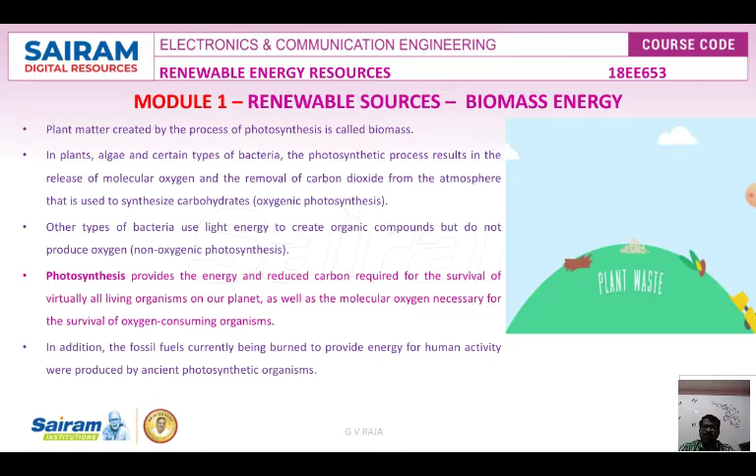There are several methods used for the conversion of biomass into electricity. Either we can directly burn the biomass to generate electricity, or synthesis gas production by gasification, and methane gas production by anaerobic digestion, like biogas.

That is how biogas is generated: we keep all agriculture waste and vegetable waste along with cow dung, cow waste, animal waste, and pour it into a basin or boiler as a liquid or semi-solid form. We pour in some water, and the basin is fully covered with some kind of varnish which will avoid the rays of light from the sun falling onto this basin or boiler.

After 2 or 3 days, if you open that boiler or basin, you will get a bad smell. That is not a bad smell, it is methane smell. If you burn that methane, fire will be formed. That gas is called biogas, and it is used for domestic applications.

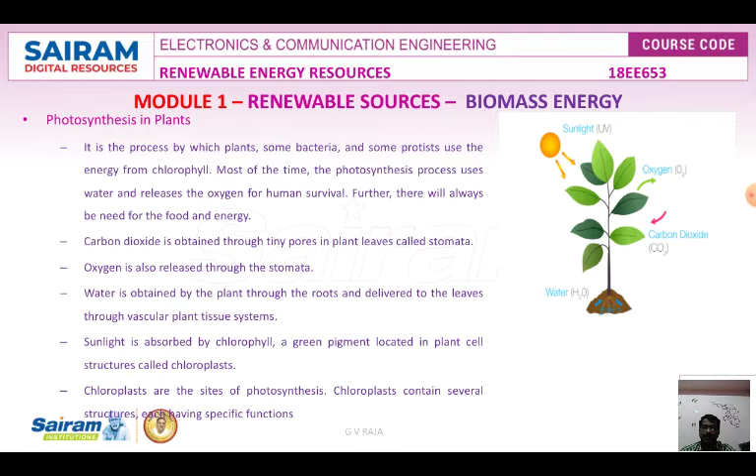There are two types of photosynthesis process. One is oxygenic photosynthesis, another is anoxygenic photosynthesis. The photosynthesis process in all plants, which involves some bacteria, involves the reduction of carbon dioxide to carbohydrates and removal of electrons from H2O. Water is poured into the roots, so electrons from the H2O have to be removed, which will release oxygen. This process we call oxygenic photosynthesis.

Anoxygenic photosynthesis: this occurs in the domain bacteria and has representatives of four phyla, like purple bacteria, green sulfur bacteria, green gliding bacteria, and gram positive bacteria. These also use light energy to make carbohydrates from carbon dioxide and water.

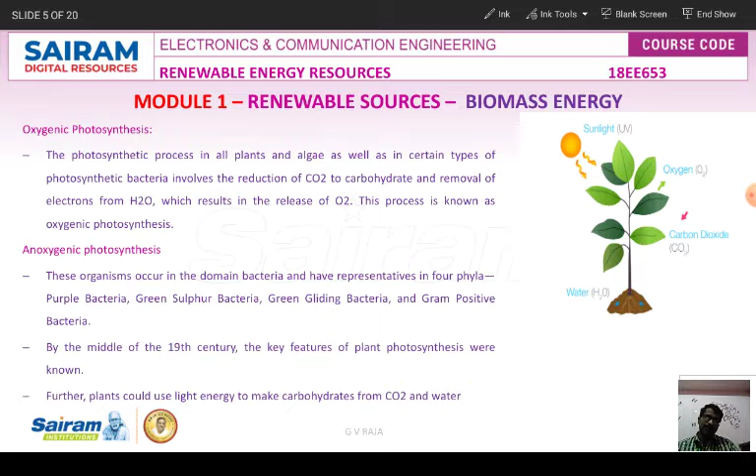The conversion of the remaining waste product to usable energy includes generation of methane gas with the help of biogas or other kinds of fuels like biological conversion, hydrogen also used. Generation of electricity either from the first step itself, that means biogas conversion itself, or through thermomechanical process, where biogas is sent as steam to rotate the turbine which generates electricity, is called a thermomechanical process.

And the same bio waste materials are used as fertilizer for agriculture and crop cultivation process. Treatment processes are designed to reduce waste to an innocuous form, without or after energy recovery. The most familiar techniques are burning of waste at high temperature in the presence of oxygen, and breaking down complex compounds using heat in the absence of oxygen. That is the major biomass production.

So we know that the sun is the primary source of all kinds of raw energy, including biomass. The next process is biogas. Biomass, for example, burning wood or a tree, will generate heat. That heat is used to boil water, which is converted into steam, and it is passed through the turbine. The steam rotates the turbine and generates electricity with the help of a generator. This is nothing but biomass conversion.

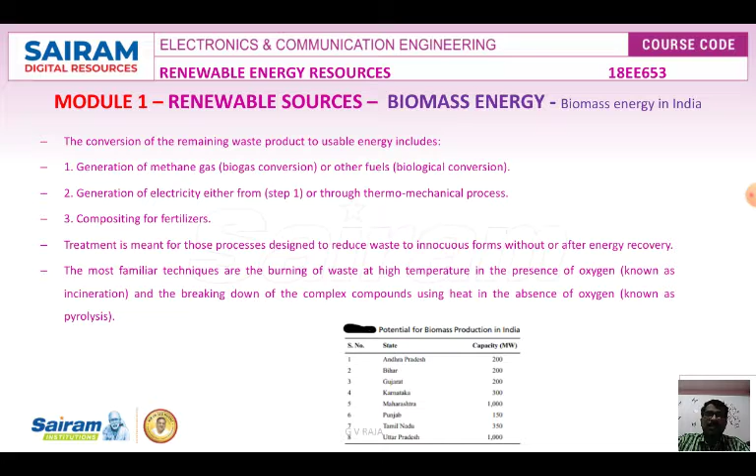Next is biogas conversion, which is also a promising energy conversion technique. Here all bio waste, vegetable waste, and other kinds of waste are dumped into a small turbine or boiler or furnace, and the furnace is covered with a black coating in order to avoid sun rays falling onto it. You might have seen this kind of setup nowadays in villages and rural areas.

After that, gas is produced due to the reaction inside this component. This gas is used as a combustion fuel, for things like forest foods and waste, agriculture crops and residues, residential food waste, industrial waste, human and animal waste, energy crops—all these things are dumped into this furnace. The gas is produced and used to steam water, which is converted into steam, and electricity is produced.

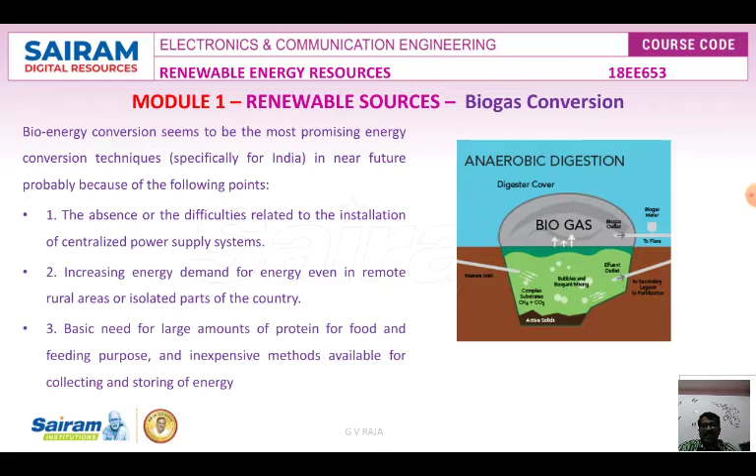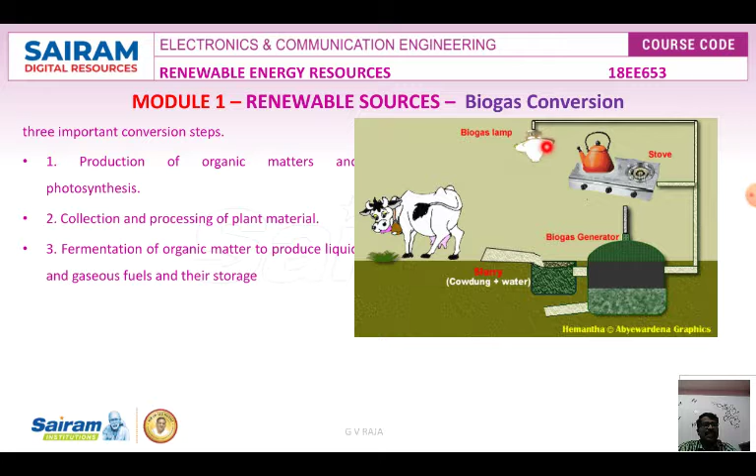This is biogas conversion: the production of organic materials using photosynthesis, collection and processing of plant material, and fermentation of the organic material. So animal waste, cow dung, with water, is given to this furnace, then gas is generated, which is used for lighting lamps as well as stove operations.

Next, biological hydrogen production. Hydrogen is a clean fuel. It is an energy carrier that can be used for a broad range of applications, and is the most abundant element in the universe. The sun and stars are composed largely of hydrogen. Hydrogen is a component of more compounds than any other element.

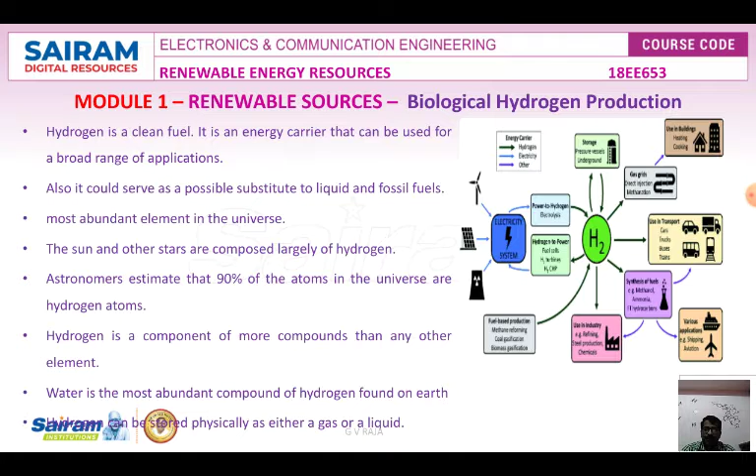The storage of hydrogen gas typically requires high pressure tanks. The storage of hydrogen as a liquid requires cryogenic temperatures because the boiling point of hydrogen is very low. Hydrogen can also be stored on the surfaces of solids or within solids.

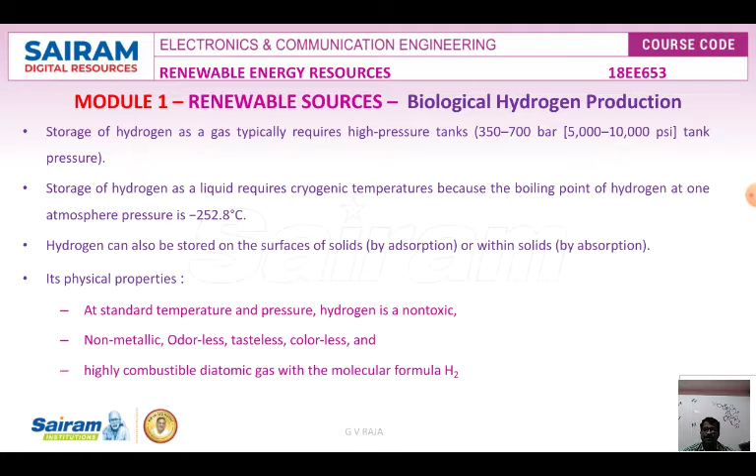So biological hydrogen production appears to be another promising conversion technique, where the only energy input is solar energy and a hydrogen donor. The biological hydrogen schemes are produced at a low temperature level, and the scheme is free from pollution. The fuel produced, hydrogen gas, is a very clean burning fuel. It can be used for human and animal consumption purposes.

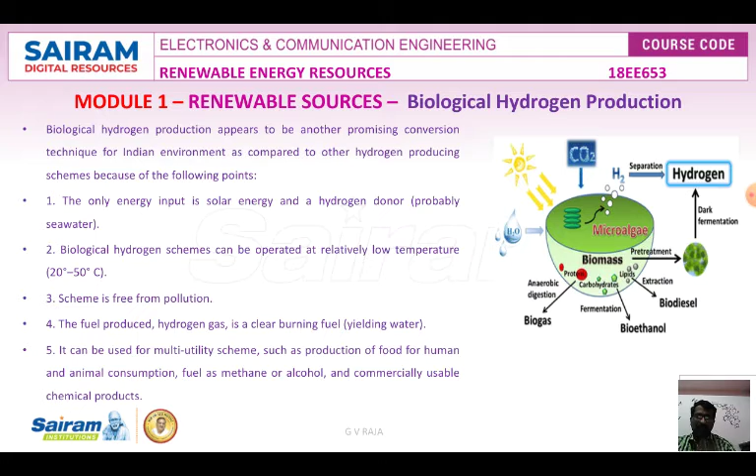The next one is decentralized and dispersed generation. Decentralized energy is the opposite of centralized energy. Centralized energy means every unit of energy is created in one area and given to the distributed area by means of transportation or transmission of the energy. That is centralized. Decentralized means generating energy on-site itself. For example, in an industry itself, we can generate energy with the help of a windmill or solar cell.

Or with biomass. This is called decentralized and distributed energy system, an on-site power generation system. It generates the power and energy needed by residential, commercial, or industrial customers on-site.

Some of you moving into metropolitan cities may have seen that in some industries they have their own power plant for generating their power. In some malls also they keep some kind of power generation like wind generation, solar generation, electricity generation with the help of a solar energy system, or solar refrigerator energy systems.

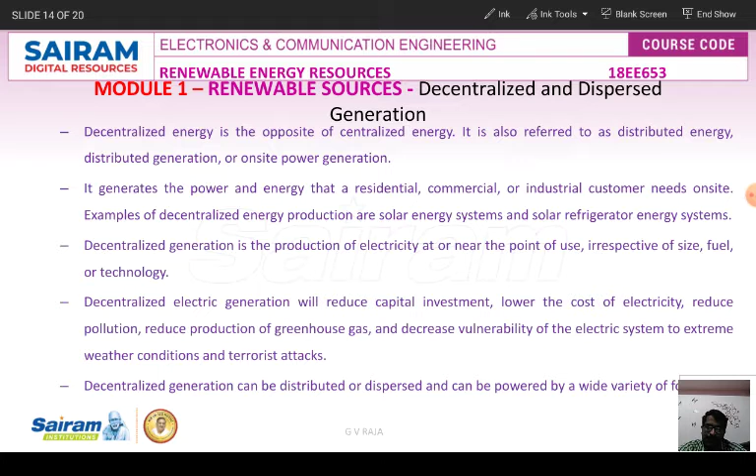So there are various kinds of dispersed generation. Advantages include low cost electricity, geographical factors, saving outage costs, increasing demand in the intermediate sector, and a low payback system. If you are talking about distributed generation, there are two types: one is non-renewable, the other is renewable fuels. Both non-renewable and renewable energies are used in distributed generation. Non-renewable means oil and gas, natural gas are used. Renewable means wind, solar, hydrogen, and biomass are used for generating this.